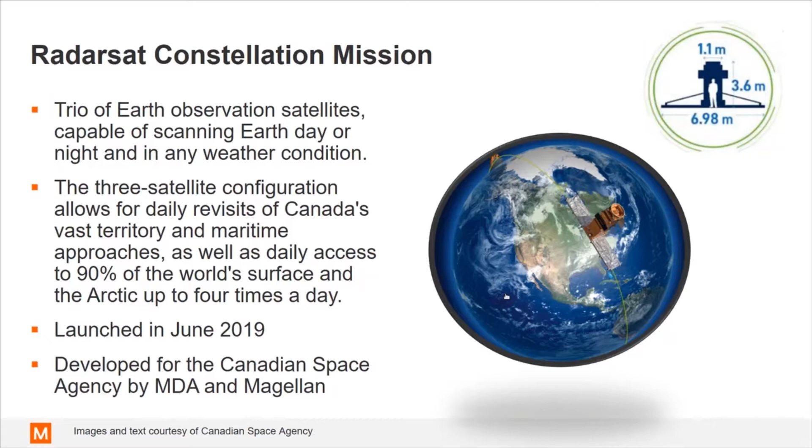My presentation is entitled Spacecraft Model-Based System Testing, Correlation of Test and Simulation. The RADARSAT Constellation Mission, or RCM, consists of a trio of Earth observation satellites. Maya HTT was responsible for the structural design and for the structural simulation of the bus and the spacecraft. These were launched in June 2019 atop a Falcon 9 rocket.

Engineers are often asked, how do you know that your analysis model is accurate? The answer depends on the structure's heritage, the team's experience, as well as its skill in modeling complex assemblies. In the case of spacecraft systems, the loads are derived from coupled launcher spacecraft simulations, and hence the spacecraft model must be accurate. It's often required to integrate dynamic testing into the development plan on either a prototype, the first flight structure, or a combination of both.

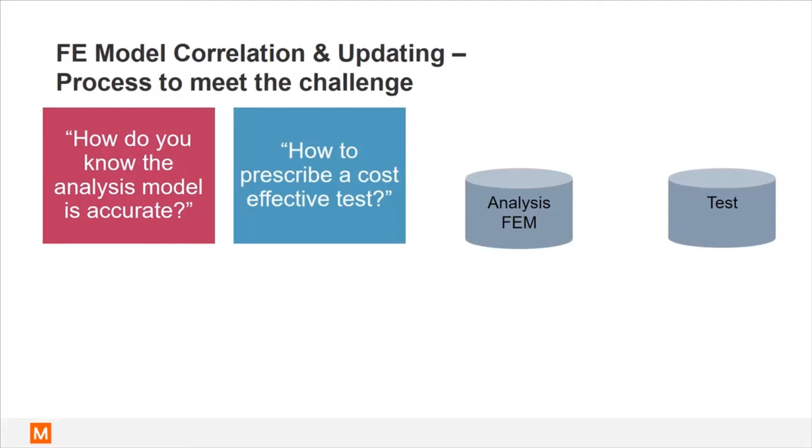Next, you need to prescribe a cost-effective dynamic test. If the test article is the flight structure, the test must be quickly performed with as little instrumentation as possible. Next comes the question, how do you compare simulation and test? Well, you need to define goals or requirements for the quantitative correlation of the target modes. And we also need to know how to implement these in the software.

Finally, if the correlation requirements aren't met, we need to update the model to align it with reality. Here, the engineer's knowledge is leveraged to guide the software in determining the changes to the FEM. SimCenter 3D FE model correlation encourages a process and offers tools that help answer these questions, starting with pretest, which ensures test quality and helps to speed up the test setup by determining sensor and exciter locations and directions, which are shared with a test engineer.

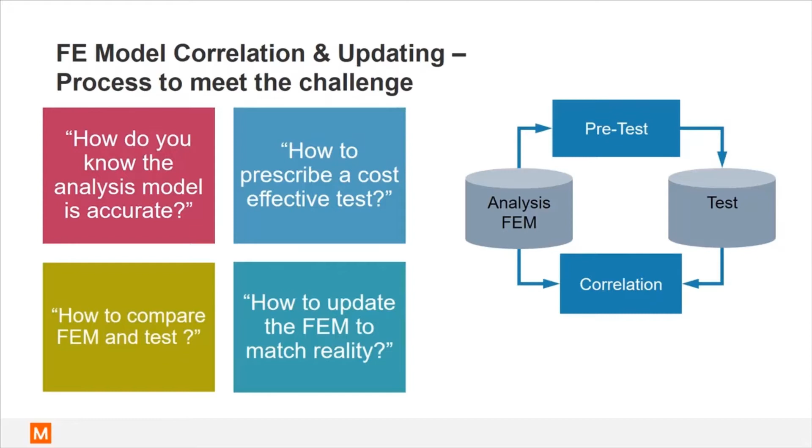As the test is carried out, we begin evaluating the correlation with analysis. Often many sets of test data are generated. Finally, model updating can be performed. The goal of the RCM modal test was to produce an updated spacecraft FEM for Falcon 9 coupled loads analysis. In the absence of fidelity requirements, we propose the following goals for correlation of the target modes using the updated FEM: cross-orthogonality diagonals above 0.8 and off-diagonals below 0.2, as well as a frequency difference smaller than 5%.

The target modes were the fundamental spacecraft lateral and thrust modes, which contain lots of effective mass and generate high stresses, secondary spacecraft lateral modes, and fundamental SAR antenna modes. The SAR antennas are the two large structures or panels on each side of the spacecraft in the stowed configuration.

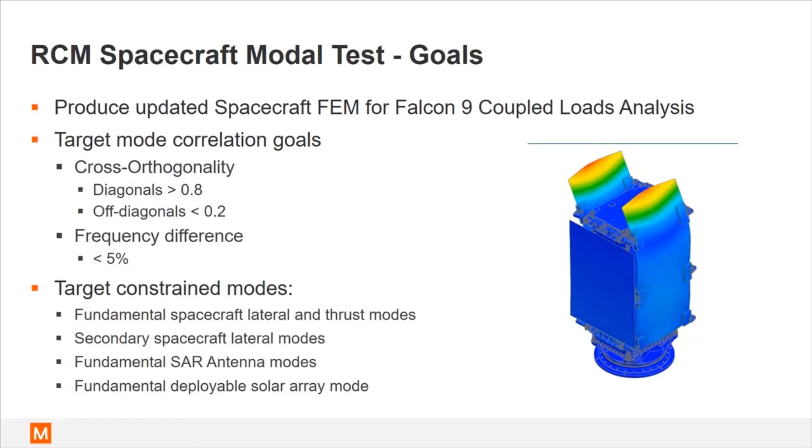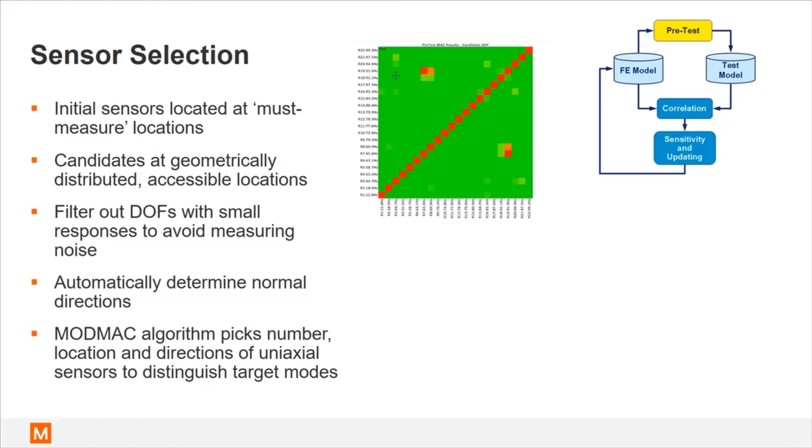Next, we define the locations and orientations of the sensors or accelerometers to distinguish the target modes. There are locations at which measurements are mandatory for contractual or technical reasons. These define so-called initial sensors. Optionally, we can add locations at which we expect large displacements that result in good shape animations. We then define candidate locations and directions. We filter out degrees of freedom with little response and define a geometrically distributed subset of accessible locations.

In some areas, like on the interface adapter, it's difficult to align sensors with the global axis, and so the software automatically calculates the normal direction. The maximum off-diagonal modal assurance criteria algorithm, or MODMAC, takes the initial sensors and sequentially adds candidates until the AutoMAC matrix off-diagonal terms are below a user-defined threshold.

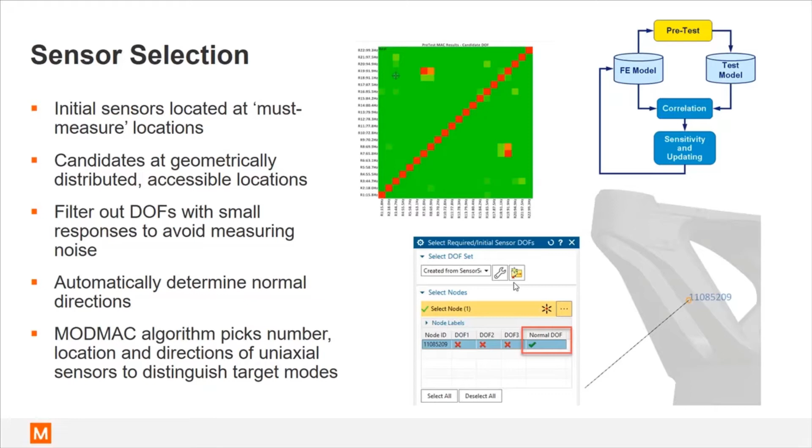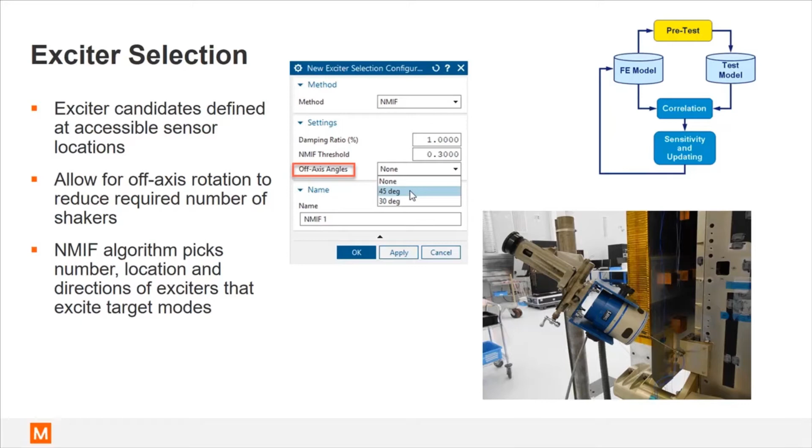Next, we need to define suitable locations at which the structure can be excited. Exciter candidates are taken from the externally accessible sensors. In order to reduce the number of exciters, we instruct the code to consider off-axis rotations of 30 or 45 degrees. The normal mode indicator function algorithm, or NMIF, determines the fewest possible degrees of freedom to excite the target modes. For large structures like the spacecraft, which contain many structural joints, we increase the damping ratio and reduce the NMIF threshold.

Next, we need to define a wireframe which connects the sensors and allows the test engineer to visualize the test and analysis mode shapes. A wireframe can be defined automatically using an algorithm we provide, manually, for example, by graphically selecting nodes, or a combination of both techniques. It's also possible to automatically add a denser visualization wireframe which allows for the analysis shapes to be better understood by the test engineer.

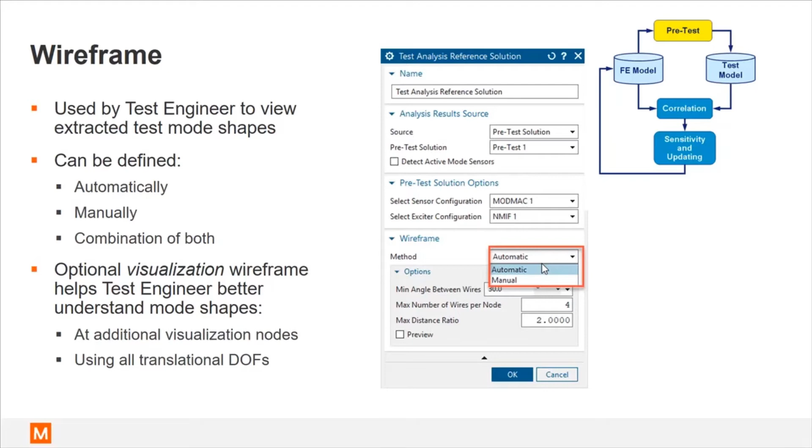The test analysis model, consisting of 125 uniaxial sensors, 2 exciters, a wireframe, and the analysis modes reduced to the sensor degrees of freedom, was sent to the test engineer. It's always expected the test engineer may need to modify the instrumentation, for example, to move an exciter, in order to measure quality data suitable for shape extraction.

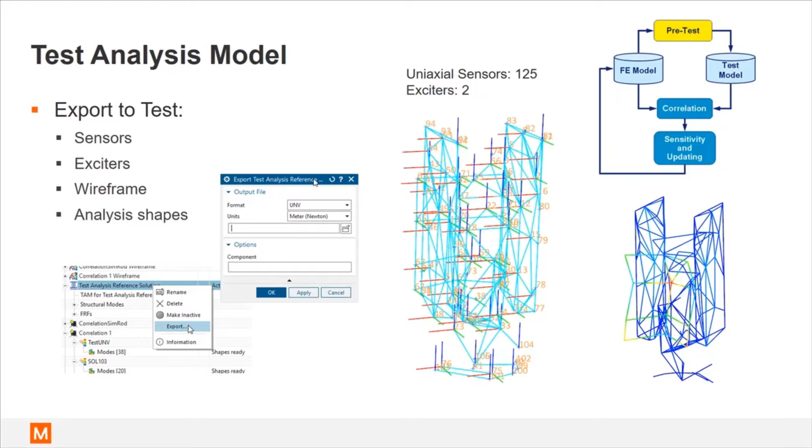There were over 40 different measurements done during the RCM modal test, with different input signals, force levels, stingers, exciter locations, and active sensors. Given the amount of back and forth during and after test, it's essential that the interface between test and simulation be as seamless as possible. It's of course necessary to support legacy data formats such as the universal file. However, the increasing demands on data exchange can be better achieved via dedicated native formats.

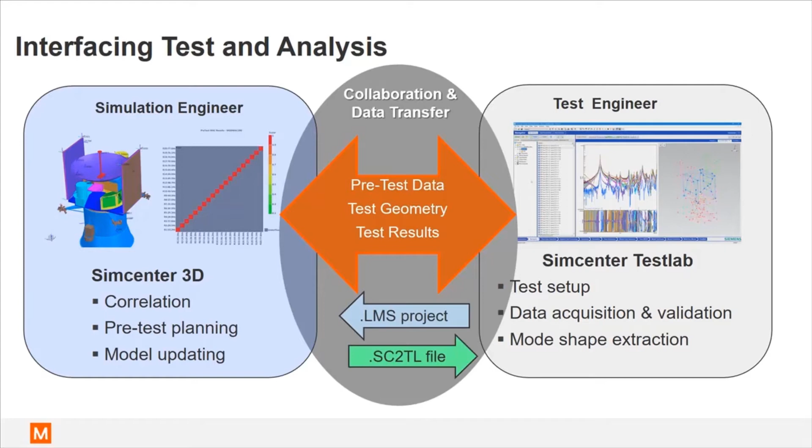The normal modes of the large spacecraft FEM, consisting of over 1.1 million elements and 1.5 million nodes, were correlated with the shapes from the tests that displayed the best data quality. Sensors were added by the test engineer at the interface plate between the adapter and the concrete floor, as we were concerned with the effect of the floor and the underlying soil on the spacecraft dynamics.

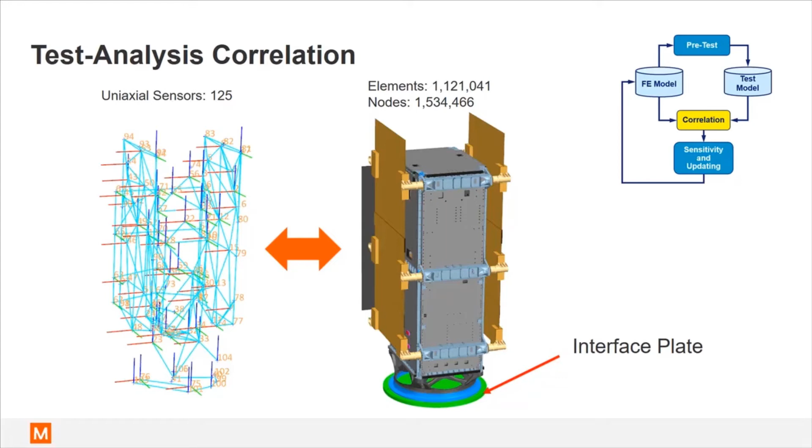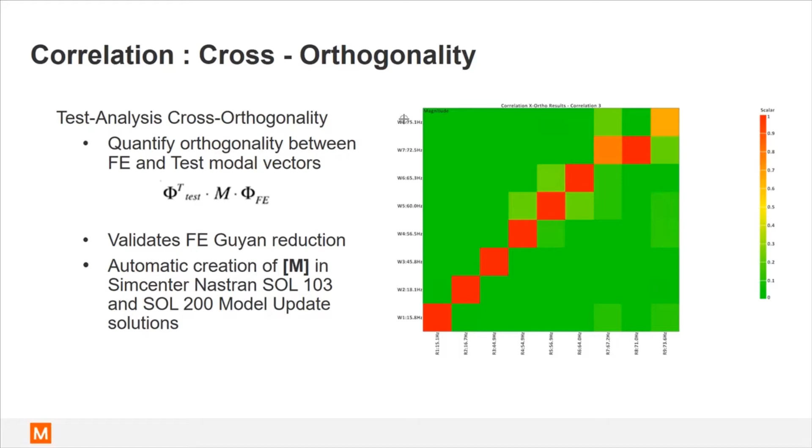Simcenter Nastran Guyan reduction was used to generate a reduced mass matrix at the equivalent sensor degrees of freedom. Orthogonality between the test and analysis mode shapes can be assessed via the matrix plots, as well as the automatically generated mode pairs. A value of 1 indicates perfect alignment, whereas 0 indicates perfect orthogonality. Modal Assurance Criterion, or MAC, is a scalar measure that indicates the degree of agreement between reference and work mode shapes. A value of 1 indicates perfect correlation.

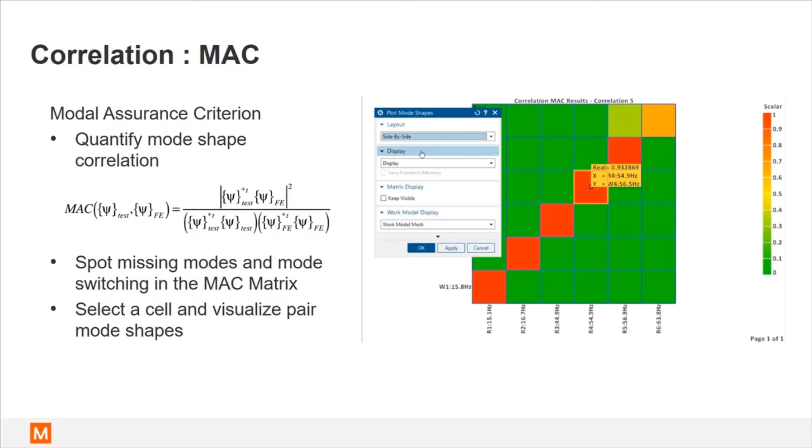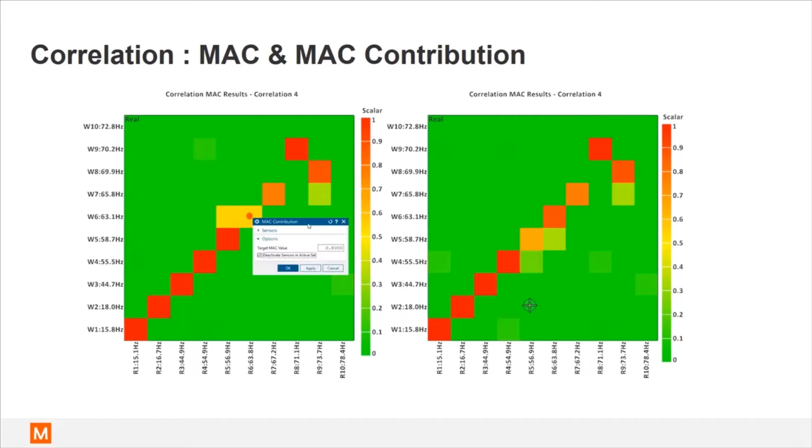In order to qualitatively assess the shape correlation for any mode pair, you can select a cell in the matrix and view the associated shape displays or animations. It's possible to identify which sensor degrees of freedom contribute to a poor MAC value and automatically remove them from the sensor set. On the left, the original MAC matrix. Selecting a cell which we want to improve, and then defining the target MAC value, the software removes as many degrees of freedom as required to achieve the target, and we obtain an updated MAC matrix on the right.

Whether or not the degrees of freedom should be removed is an interesting question. A faulty sensor is an obvious candidate for removal. In this example, however, we've removed 7 sensors to help distinguish 2 modes that were much closer in test than in the simulation. It's been suggested that a small change in the length of the shape vector could be justifiable.

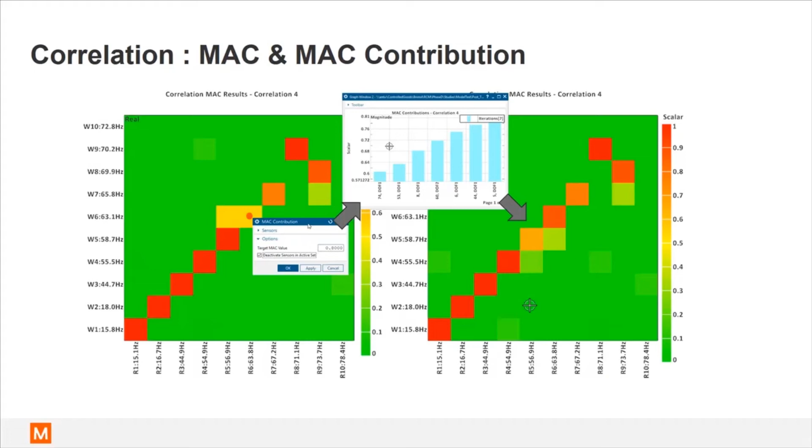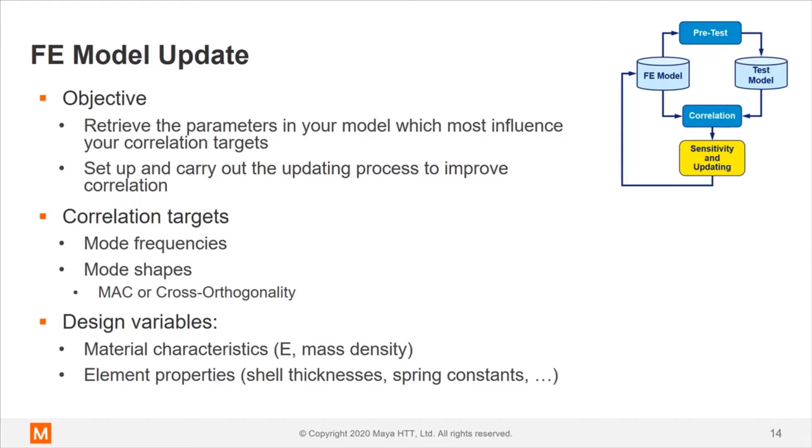Once you've established a degree of correlation between test and analysis, you may need to improve the correlation by updating the FEM. Using engineering judgment, you define design variables that are allowed to change. These can be material properties like Young's modulus or physical properties like shell thickness. Let's look at this sensitivity-based process in detail.

First, you need to define a SOL 200 model update solution, which simply computes the sensitivities. You define degrees of freedom for reduction, which can be either modal or physical. The latter is a Guyan reduction. You then create a model update solution process, which uses the SOL 200 model update solution as work, and the test solution as reference. You define the targets to use in the optimization. These should be the frequencies or shape metrics for the target modes.

You can define global or individual weights, modify the design variable bounds, and then select one of the 3 optimizers. Since the SOL 200 sensitivities are linear, they must be recomputed. You re-solve the Nastran SOL 200 model update solution with the updated design variables, refresh the model update, and optimize once more. Finally, you update the FEM.

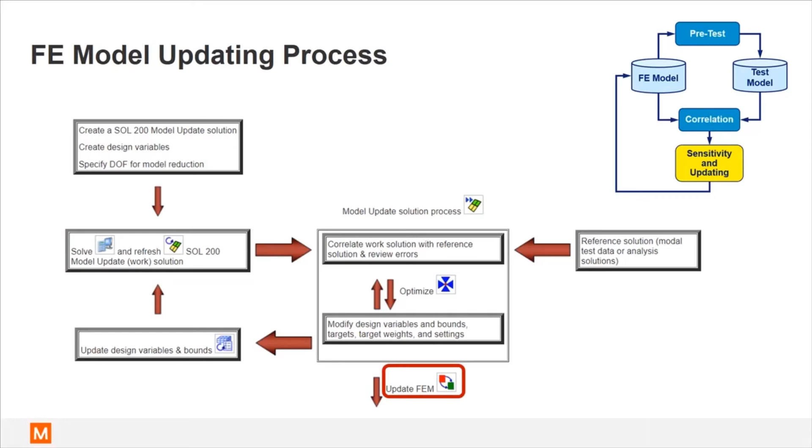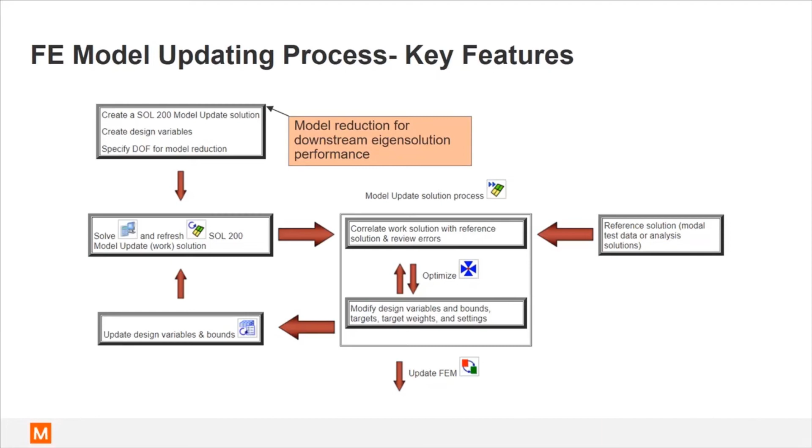Some key features of the model update process include defining a model reduction in the first step, which allows the optimizer to quickly solve the reduced dynamic model using the updated design variables at each iteration. Mode shape targets are based on MAC or on cross-orthogonality. This allows you to converge on your specific shape correlation goals.

Optimization targets can be the mode frequencies or the frequencies and shapes of your target modes. This allows you to also converge on your frequency difference correlation goals. You can manage your design variables by freezing them, manually modifying them, or by changing their upper and lower bounds.

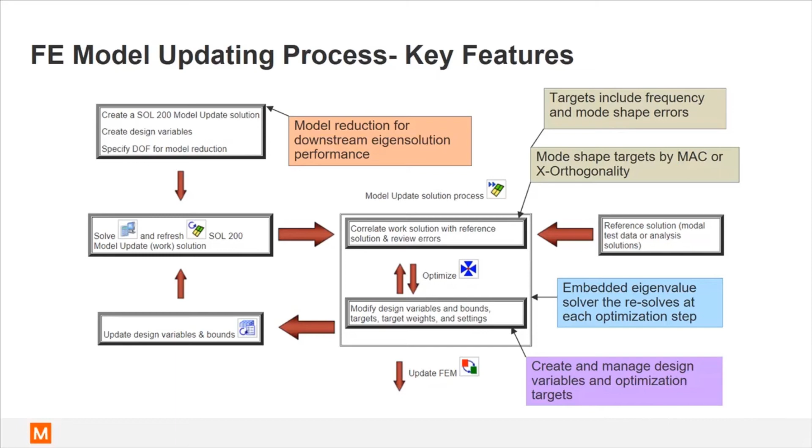Updating the FEM means updating the Simcenter 3D FEM part, which can be leveraged in any number of simulation parts and multiphysics solutions. There is no external file handling required.

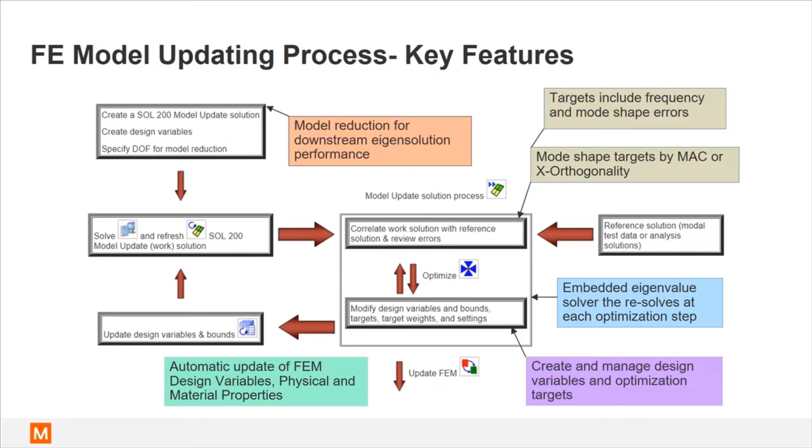Now the tricky part. What in the FEM to update? Much of the uncertainty in the FEM stiffness comes from structural interfaces like bolted joints. These are complex nonlinear assemblies which behave linearly when properly designed. There are more and more options to simulate them, for example, solid models of bolts and washers with preload, contact,

glue. On the other hand, simple and traditional rigid element spring combinations provide solution efficiency since contacts don't need to be established, and since really dense 3D meshes aren't required. These also provide the ability to optimize the stiffness in the model update process.

If you know you're going to perform an update on your FEM, you can define interface elements that can be tuned, like springs or beams. You can also define meshes around joint locations to which you assign special materials, the properties of which you can tune. There's overhead in defining these material and physical properties and meshes that will be used to update the FEM.

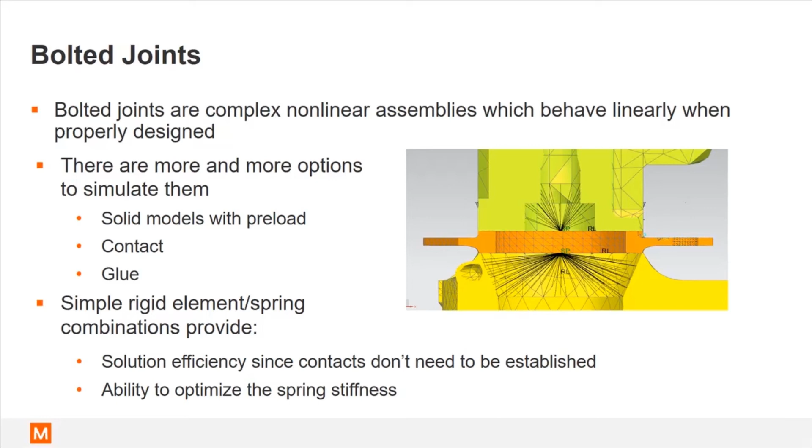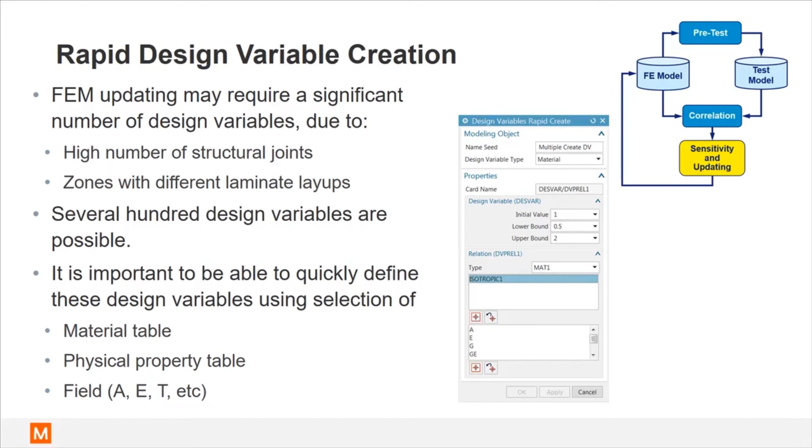FEM updating may require a significant number of design variables, for example, if you have many joints or if you have many different layups. So several hundred design variables aren't impossible. It's important to be able to quickly define these design variables, and tools exist that allow you to select one or more material and physical property tables and then assign the required fields such as area, Young's modulus, etc. that you want to use in your design variables.

In the case of the RCM FEM, the following structural joints were specifically identified for updating. The SAR antenna cup cones for deployment, the discrete interfaces between the bottom of the bus and the interface adapter, the contact area between the interface adapter and the payload attachment fitting, joints between the test interface plate and the concrete floor.

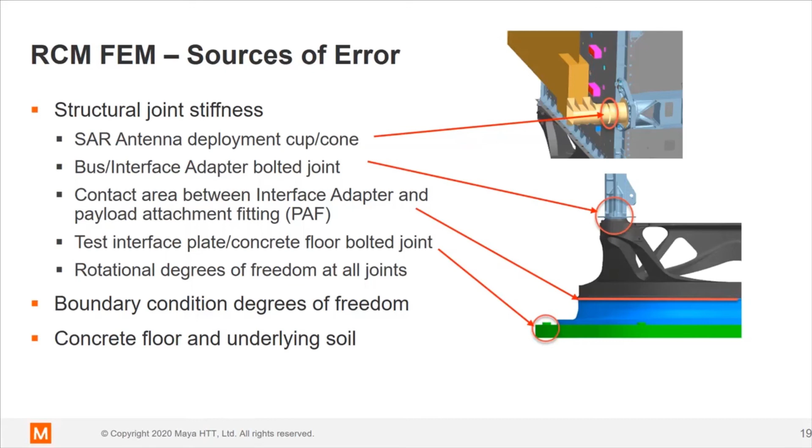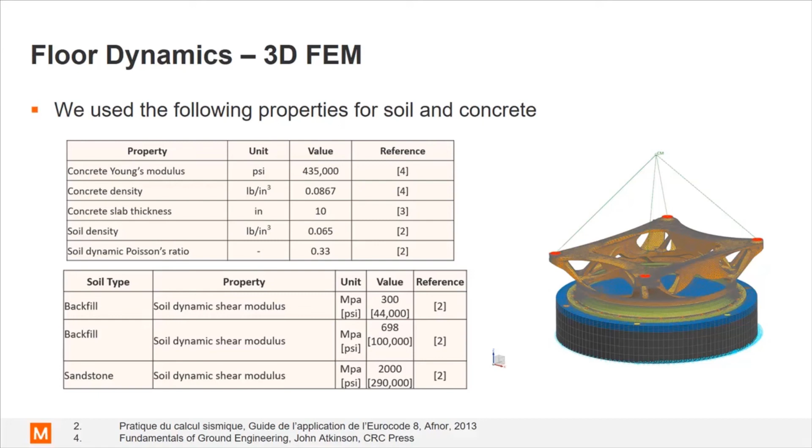We developed a 3D FEM of a region of the concrete floor below which the soil was modeled using spring elements. The tables show the properties which we assumed to define the materials. This provided a prediction of the drop in frequency for the fundamental lateral and thrust modes, all of which exhibit significant effective mass. An equivalent 2-degree-of-freedom method was identified, which allowed us to predict the frequency shifts using a simple spreadsheet. Aside from the higher than expected test analysis frequency difference for the fundamental modes, a strong indication of soil participation was the unusually high damping that we measured.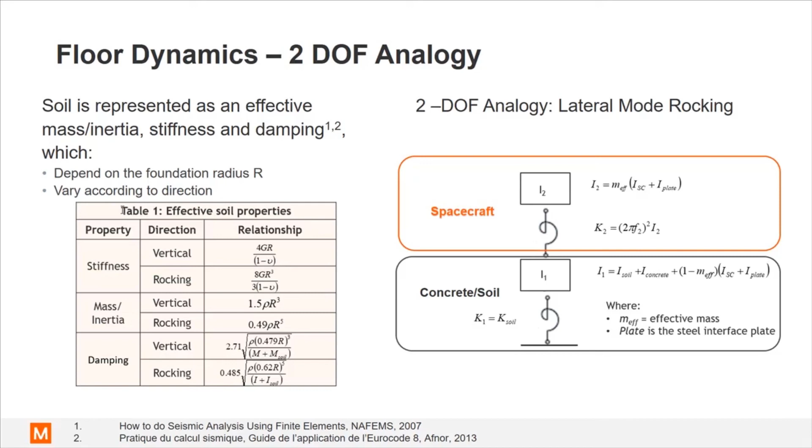The correlation and updating effort was complicated by the floor dynamics. Substantial analysis time would have been saved had a seismic block been used, which on the other hand would have had significant cost and schedule implications. The deployable solar array FEM was updated by the contractor, and we also added air mass in the spacecraft FEM.

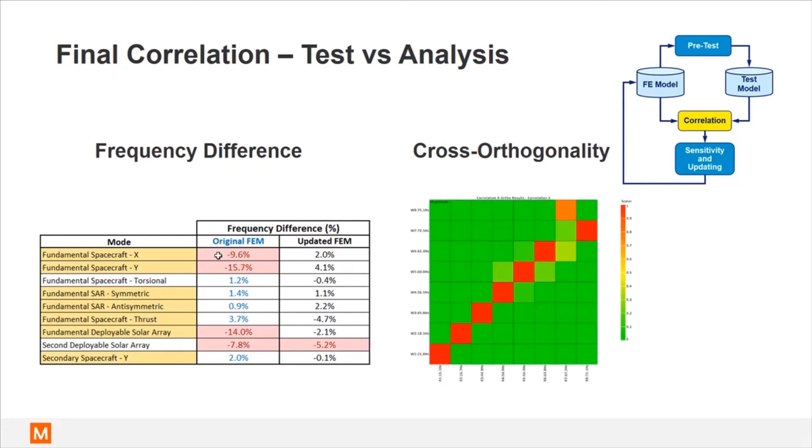The final correlation metrics are shown here. We achieved better than 5% frequency difference for all the target modes, which are shown with yellow shading. In terms of cross-orthogonality, we had one diagonal value below 0.8 and 3 off-diagonals above 0.2.

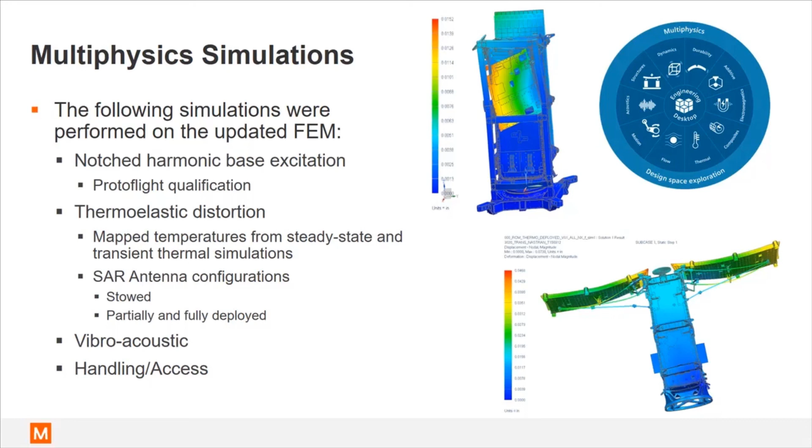The following simulations were performed on the updated FEM. Notched harmonic base excitation to define the notches and predict the response of the spacecraft during the protoflight qualification sine test. Thermoelastic distortion from mapped steady state and transient simulations. Vibroacoustic simulations using the Falcon 9 acoustic field, and handling and access simulations.